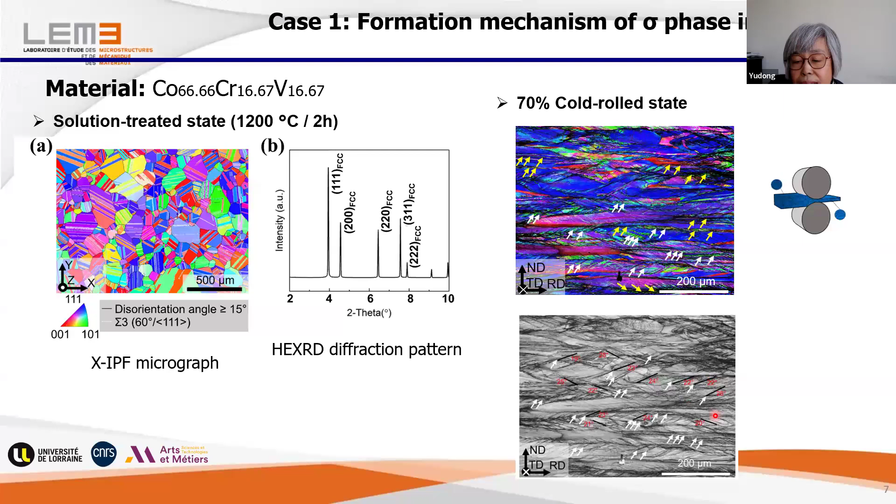If we have a look at these slip bands, we can count the angle of these shear slip bands with regard to the rolling direction, and we can see they are in this range. I will show you something later with this characteristic.

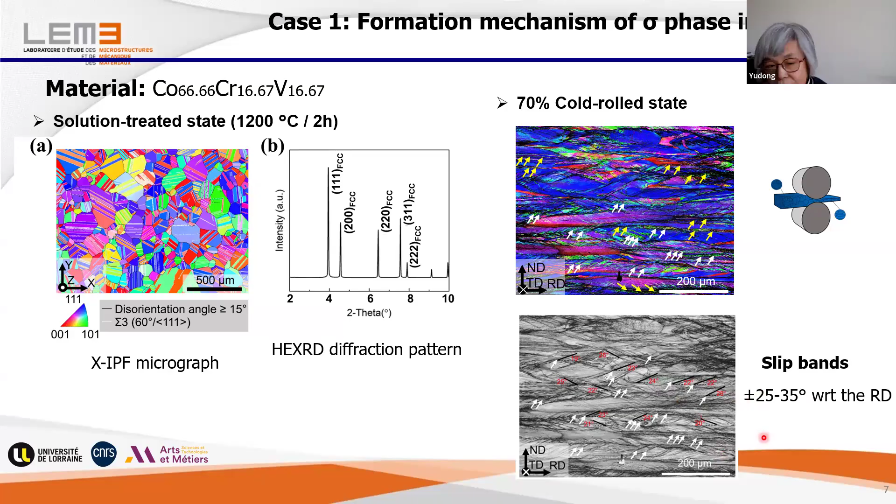After that, we made reheating, or we call it recrystallization, under inspection of synchrotron diffraction. At the beginning, the spectrum looks like this. It is mainly composed of FCC phase, but with some HCP phase. This phase is introduced during rolling.

When we increase the temperature with this heat treatment regime, the HCP phase disappears. But when the temperature reaches 900 degrees C, we see additional peaks appearing, corresponding to the so-called sigma phase. These peaks intensify with increasing temperature and reach the maximum at 1000 degrees C after half an hour of annealing. When we continue to 1100 degrees C, this peak disappears.

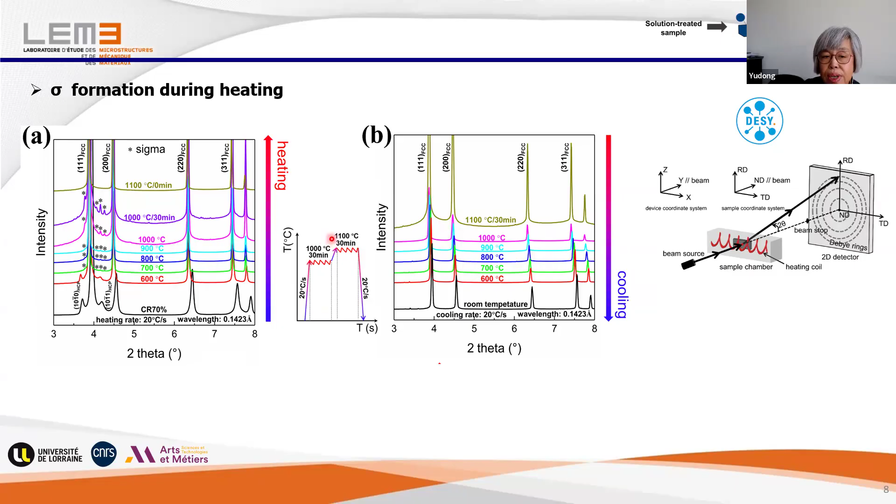When we made cooling, we see the spectrum here; we have only FCC phase. When the material re-experiences the temperature range for sigma formation, we did not get the sigma phase. According to the phase diagram, for this composition we should not have sigma formation during heating from an equilibrium state. This means the sigma phase formation was strictly related to the high density of defects generated by cold rolling.

We know the transformation is from a parent FCC phase, and the sigma phase is a topologically close-packed tetragonal phase. So how did the transformation occur through atomic processes with the aid of crystal defects? With only synchrotron, we cannot see the microstructure. We would like to know where these sigma phases form.

And then we made heat treatment, and we made ex situ examination by SEM EBSD. So we heat the material with the same heating rate. It's very quick. And then at 900 degrees C and these three temperatures, we cool the material in liquid nitrogen to freeze the heating microstructure, and then do the examination.

So we see at 900 degrees C, the material still preserves the morphology of the cold rolling state. And then we had a closer look at the slip bands, the dark area. We can see the white dots already formed in these regions. And you see they did not form homogeneously throughout the microstructure, but are mainly located in the slip band regions. And we know these parts should be full of crystal defects.

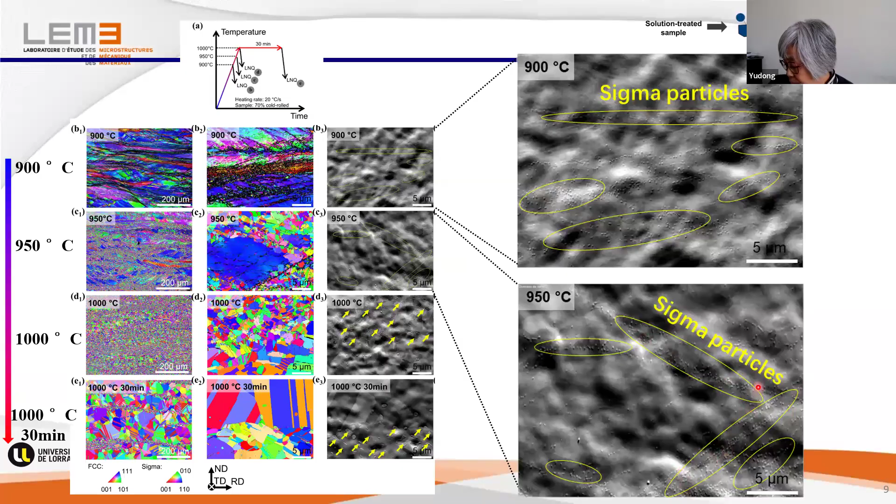And then when we increase the temperature, you see the microstructure is half recrystallized. And still, the formation of the sigma particles is not homogeneous everywhere, but mainly in the slip band regions. And then we continue to increase the temperature, the material is fully recrystallized. And then we can see slight coarsening of the sigma particles.

And now if we hold it for half an hour at this temperature, we see we have a secondary recrystallization. In some parts, the grains grow much more than in the parts full of sigma particles. And we also find the sigma particles coarsen. So with this information, we see the formation of the sigma phase is really related to the crystal defects. We'd like to know what kind of defects, and how they interact.

And then we use SEM ECCI, electron channeling contrast imaging, to study the precipitation and also the defects. And we see here are the sigma particles, and we have annealing twins. And also we have these white lines, and these lines correspond to the stacking faults. So we can see all these sigma particles are intersected by stacking faults on different orientations.

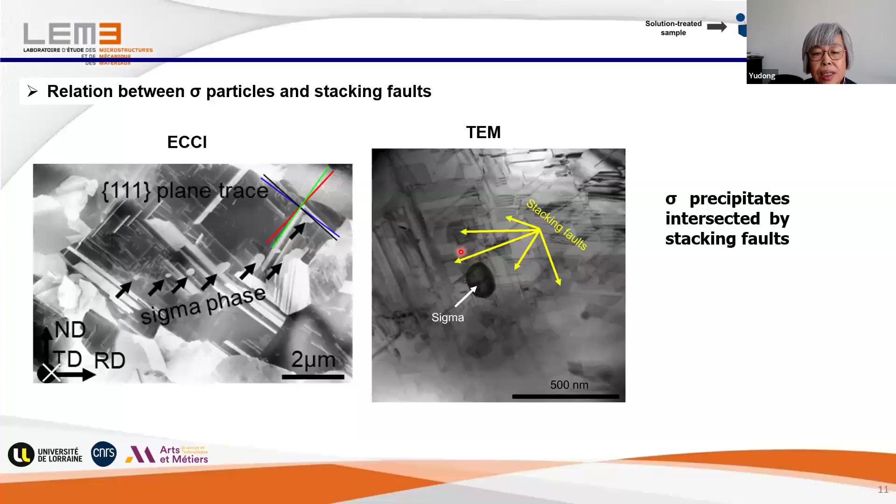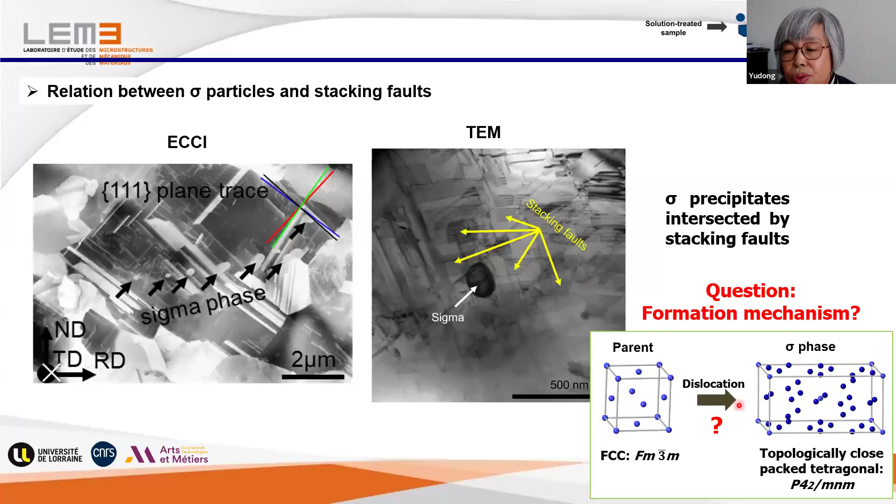And if we have a closer look with TEM, you see here is one sigma particle, surrounded by stacking faults. So the question is, from this structure to this structure, how do the stacking faults and dislocations help this atomic process, because the transformation is really ultra rapid, not normal. And to really know the atomic passage from here to here, we need to have a correlation between these two structures.

So we made a texture analysis, and we see for the stacking faults on the slip bands, the slip plane should be the 111 plane because it's an FCC crystal structure. Then we plot the FCC pole figures here, and be careful, it's not expressed in the rolling coordinate system. It's in this microstructure coordinate system. And we also searched a little bit and found that the 001 plane of the sigma phase has some correlation with the FCC plane. Interestingly, only these two pairs of 111 planes are coupled with this 001 plane, and not the other 111 plane here, you see?

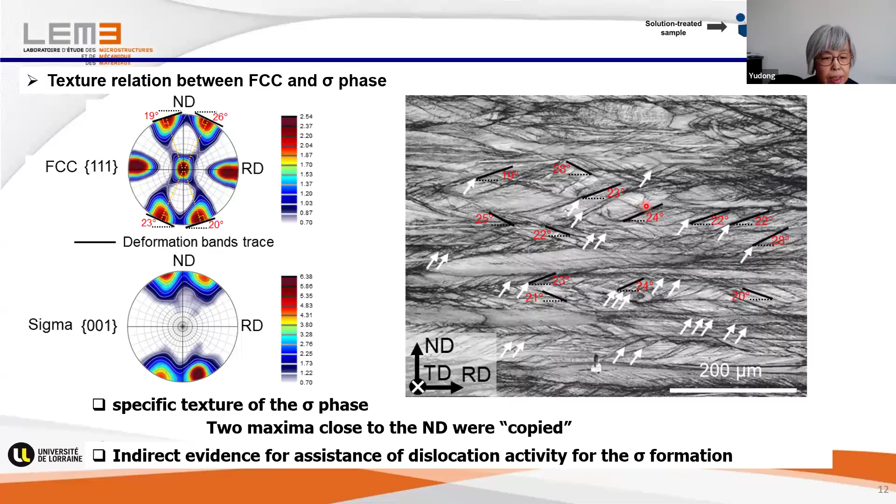And these two pairs of poles' orientations really correspond to the angle range of these slip systems, so the 111 planes. So that means we can make an atomic link between the two structures. So we can go deeper in the analysis to see how the passage happened from this structure to this structure.

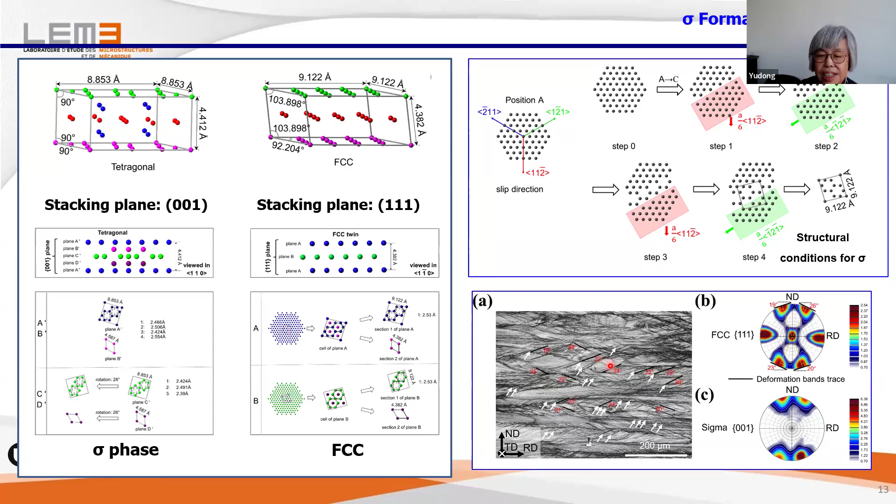And so you see, without any in situ atomic scale characterization technique, we can resolve such kind of atomic passage for phase transformation. So you see how wonderful the crystallographic analysis is. And so this work allows us to really use this, I say, forensic tool, because after that we can study much deeper and represent the process at the atomic scale. Okay, so this is the first example.

For the second example, I will show you how we use this tool to resolve the mechanisms behind the recrystallization process in the alpha phase in titanium aluminide during high temperature deformation. This part of our work is from a second thesis work, by Fengming Qiang. The material we use is at this composition. And in the phase diagram, you see the material is here.

And we heat the material to this alpha phase zone. Here you see the temperature is very high. We can only do it in Gleeble or in dilatometers. And so after holding to homogenize the microstructure, we made compression, and then we made water quenching.

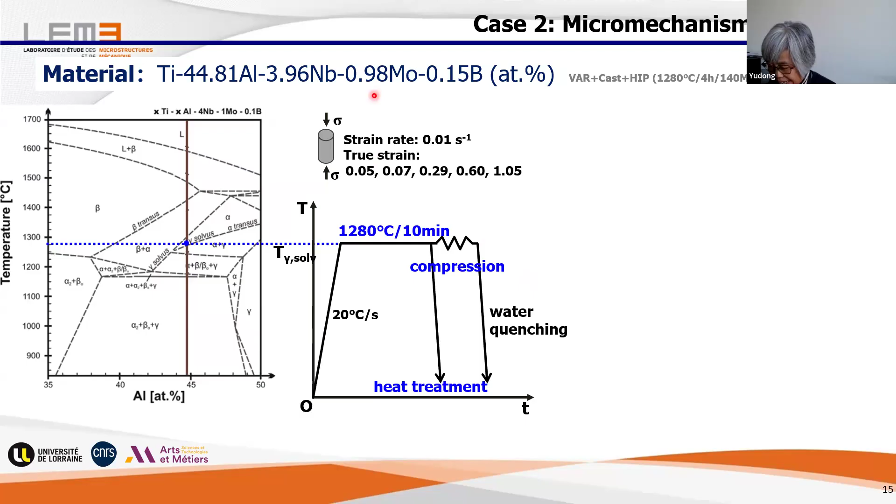Okay, and then during this deformation, we use this strain rate and different true strains until here, and the material experienced such kind of microstructure change. We like to know what mechanisms are behind each step. For this study, we encountered two difficulties. The first difficulty is the single alpha phase only exists at this temperature, and we have to do examination at room temperature. Then how to have the information of the pure alpha phase?

For this, we use a reconstruction of the high temperature phase from low temperature EBSD measurement using this magic Merengue software. It's also made in our department by colleagues Lionel Germain, Nathalie Gey, tutored by Michel Humbert. And then we have a second problem. We can artificially reconstruct the single alpha phase, but if we do examination with TEM or SEM, we cannot examine the dislocation configuration, because at room temperature in the sample we have the beta phase and the gamma phase.

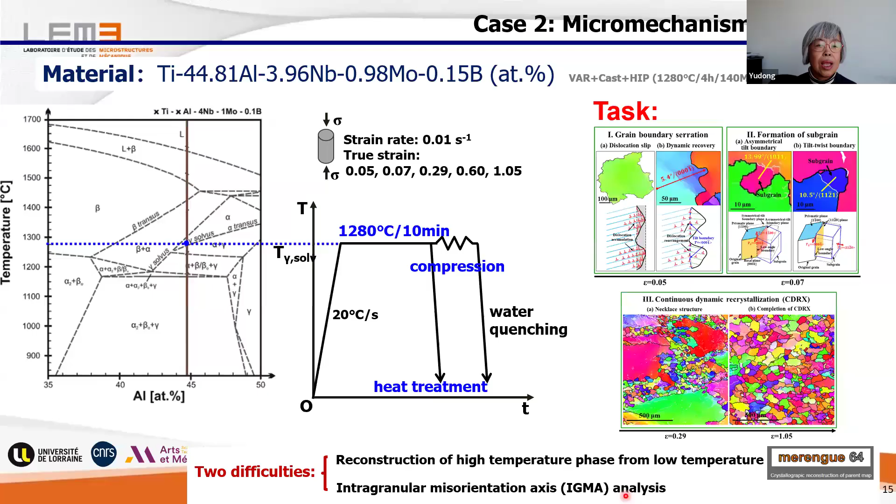In fact, the rotation axis is parallel to the dislocation line, and people call this rotation axis the Taylor axis. This Taylor axis can be calculated using the Burgers vector B and the slip plane normal N. So the method works like this: we measure the orientation of different parts, and we analyze with the software to have the disorientation in angle and axis. Then we match it with the calculated axes of the types of dislocations produced by deformation, and then we can resolve which kind of slip is activated.

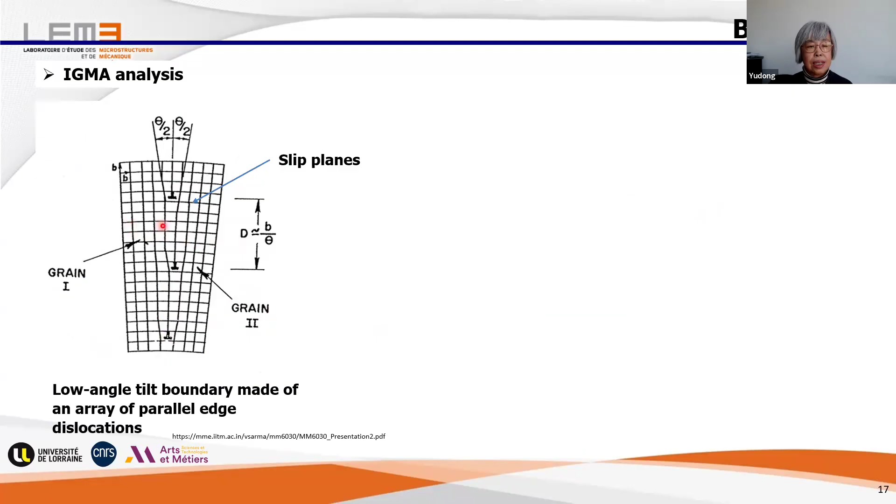Okay. So if these dislocations in the previous configuration are with high energy, with the thermal effect they will reduce the energy, and then the dislocations will climb and form a kind of low angle boundary. And the existence of such a low angle boundary also makes these two parts disoriented. So also we can describe this with the angle and axis, and this axis is also the Taylor axis.

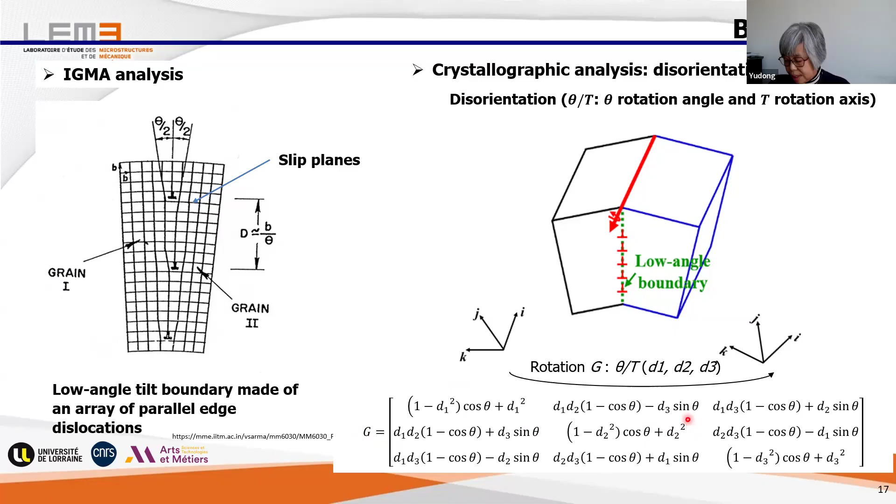And now to analyze this, we have to do a little bit of calculation. This is also a simple calculation with a rotation matrix. So you see, if this part is disoriented from this part, we can describe this with an angle and an axis, and this axis is the Taylor axis. And in this rotation matrix, you can see the components are really only related to the coordinates of this Taylor axis and the angle. And also, if we have these, we can resolve the angle and the axis. Okay, and now back to our material.

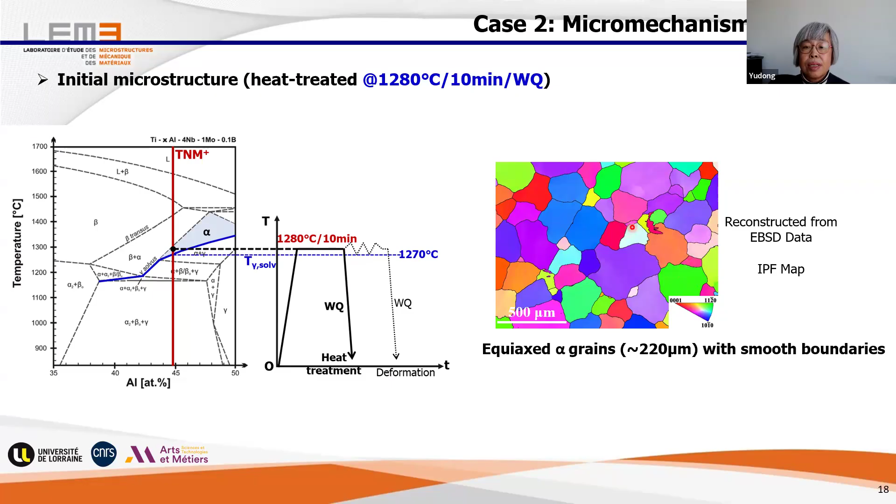So you see, when we heat the material to this temperature and then held it for 10 minutes to homogenize the microstructure, and then we made the water quench to have the initial microstructure before this compression. The microstructure is reconstructed from the EBSD map measured at low temperature, and we see it's composed of coarse alpha grains with hexagonal structure. And the boundary is relatively smooth.

And when we do the compression, with the progress of the deformation, we see the microstructure changes. And now we would like to know what happened behind to drive such microstructure change, so we made a step analysis. At the very beginning of the deformation, the change is only at the grain boundaries. The grain boundaries become not at all smooth, but more serrated. We say it's bulged. In most textbooks, such a bulge is called strain-induced boundary migration.

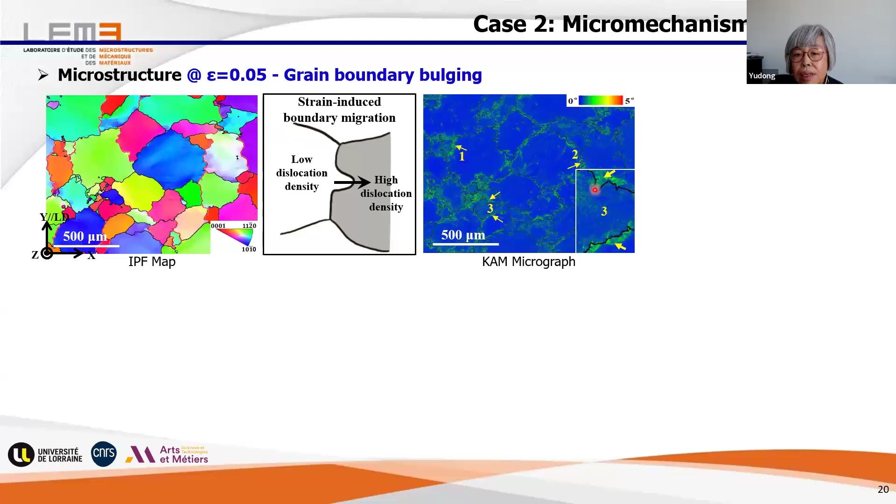And in this case, it's more from the part with low density of defects, that means low stored energy, to high density of defects, that means the high stored energy part. So this is more in the category of recrystallization. And then we made a very simple KAM analysis. Feng Ming, she made this. And from this zoomed picture, you see the situation is exactly inverse. The bulging part is with high density of defects, but in front is lower. So it's not strain-induced boundary migration, but another category called stress-induced boundary migration.

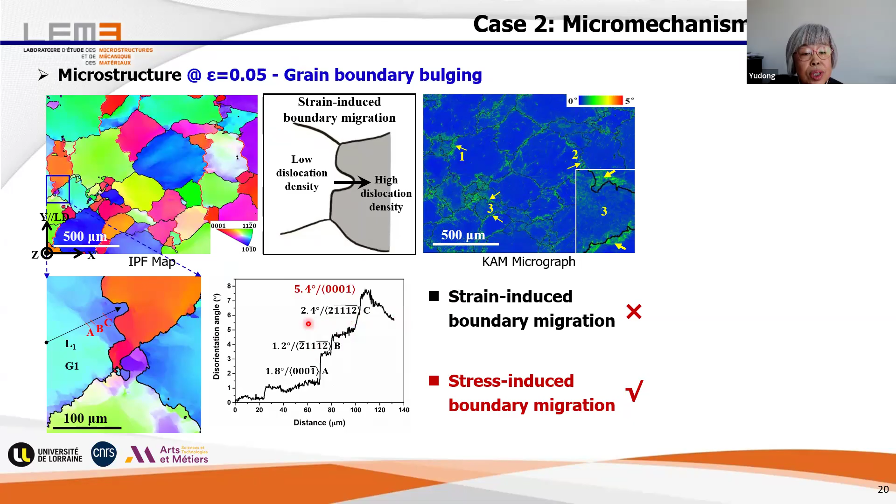Then we try to analyze which system is activated to give all these defects and have this boundary bulging. With this example, we plot the line and analyze the disorientation angle and axis and plot it here, with all the values relative to the origin. So you see the angle: we have plateau, jump, plateau, jump. In every jump the angles are different. But if we have a look at the axes, you see the axes are very close to the 0001 axis. Even with numbers like 2, 1, 1, 12, it's close to 001.

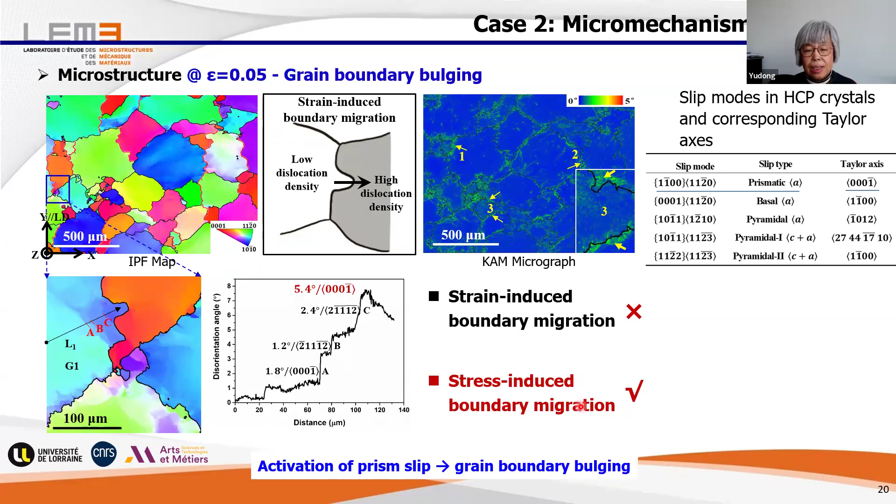And then we analyzed all the possible slip modes in HCP crystals, and Feng Ming calculated these Taylor axes here. Then we just make a comparison, and we see it is prismatic slip a, and the Taylor axis is 0001. So that means the bulging, stress-induced boundary migration, is due to the activation of prismatic slip.

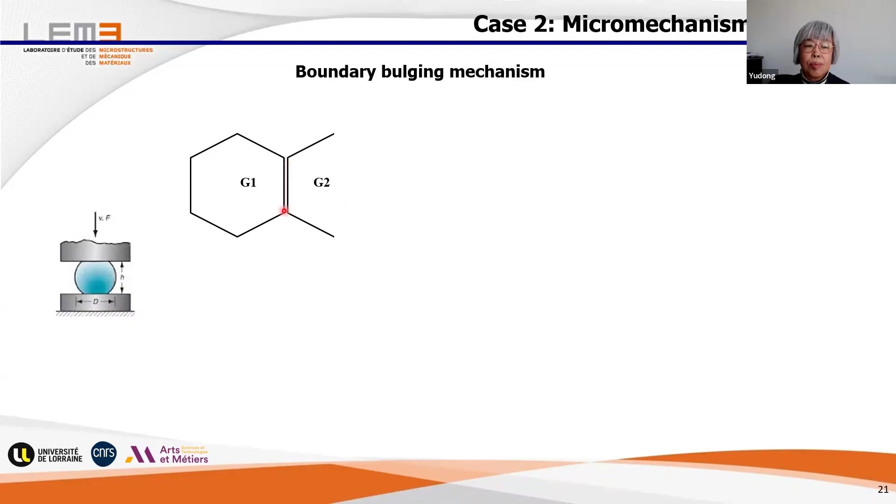And then when the prismatic slip is activated, they will create a lot of dislocations, and these dislocations will move towards the boundary area. And with such a weak boundary, this boundary works as a dislocation sink. So once one dislocation moves into the boundary region, we have a one-step extrusion of the boundary. And if a large amount of dislocations go into this area, we finally have this bulging. So this allows us to see clearly how stress-induced boundary migration happened.

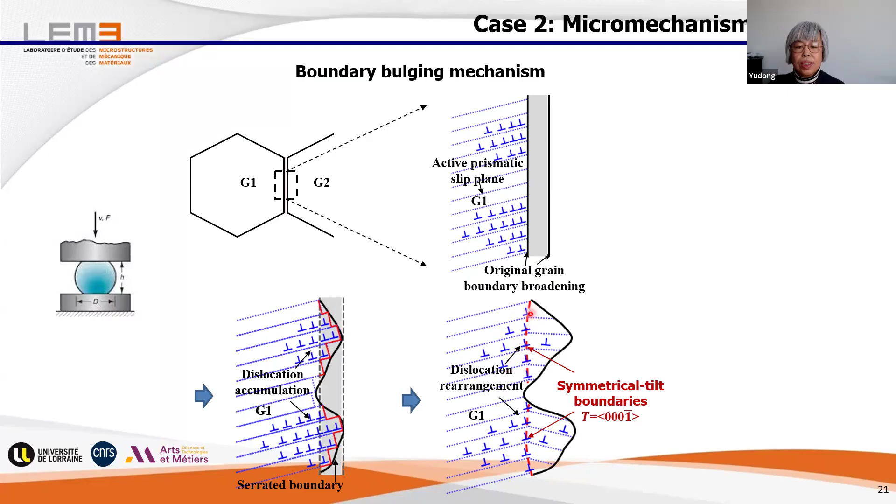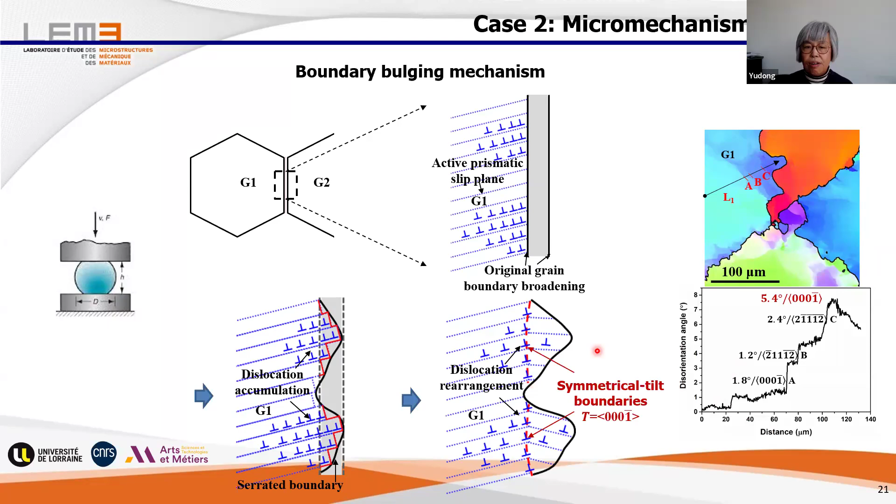But in any case, such a dislocation configuration is not energetically economical. So with the thermal effect, the dislocations will climb to form this kind of low energy configuration, and this is called polygonalization. And this corresponds exactly to what we saw before in the bulging area. If we plot the misorientation along this line, we see the jumps from the formation of such boundaries, at A, B, and C. You see jump, plateau, jump, plateau, jump, plateau. So this allows us to clearly resolve how this bulging happened.

Now we continue. When we increase the deformation to a true strain of 0.07, we see more bulgings happen, but we also see a lot of these white lines with angles between 3 and 15 degrees form along the boundary area, enclosing the bulging part. Fengming made a very careful analysis over a large area and a statistical account, and she found that 40% of such boundaries have the rotation axis 0001, which we already know corresponds to the prismatic slip. But we have another two axes with a large population: one third for these axes, and a quarter for these.

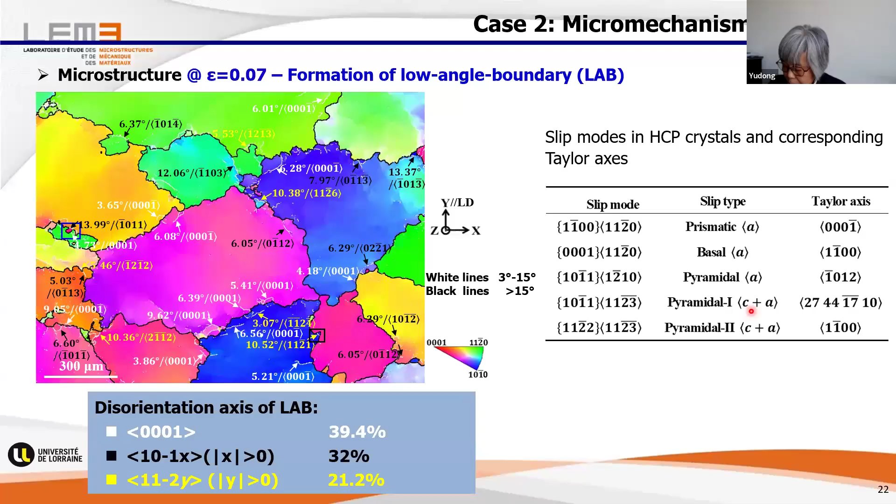In fact, for such boundaries the x and y values are not fixed; they range from 0 to 1. So what is behind the formation of such an axis? We made a comparison with the other slip modes, and we see there's no fit. That means it's not realized by the possible activation of the other slips. So we had to enlarge our search scope a little bit, and we extended this method. We thought at this stage maybe another slip is activated, and we should allow that to happen.

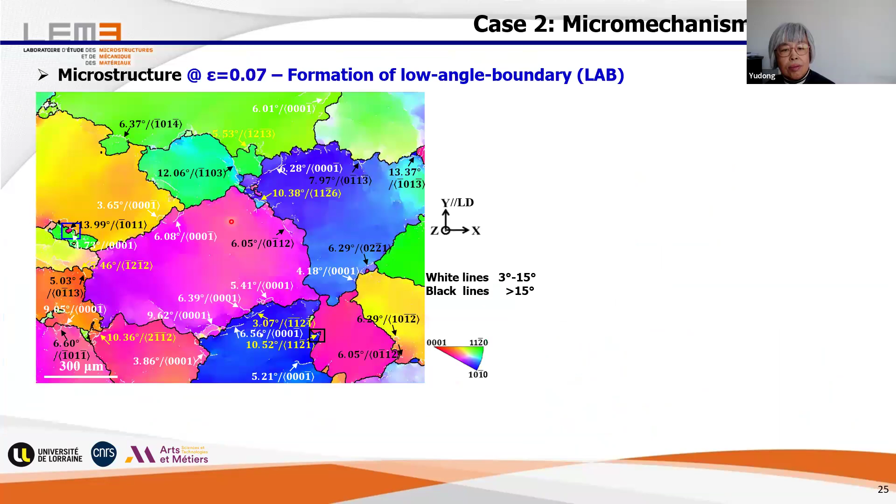And so that means, and we made a further analysis. I have no figures to show here. In fact, the orientation, the trace of this boundary normal, is exactly parallel to this axis. And so that means this allows us to identify that during this process, there's a boundary sliding. Anyhow, we deform the material at a very high temperature.

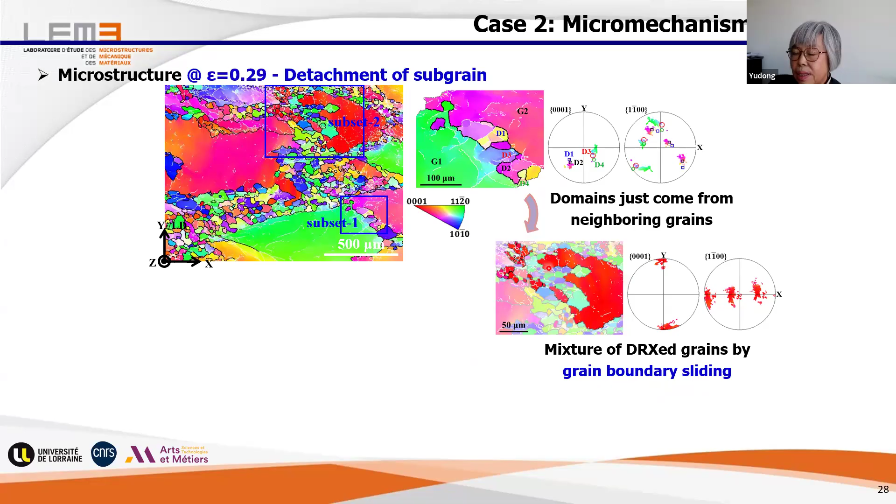That means either upper layer grains or lower layer grains will force in and separate the fragmented part from their mother grain. And with these, we have these boundary regions full of small grains. And now, if we continue our deformation to the final deformation, we see the completion, the full part recrystallized, all microstructure recrystallized.

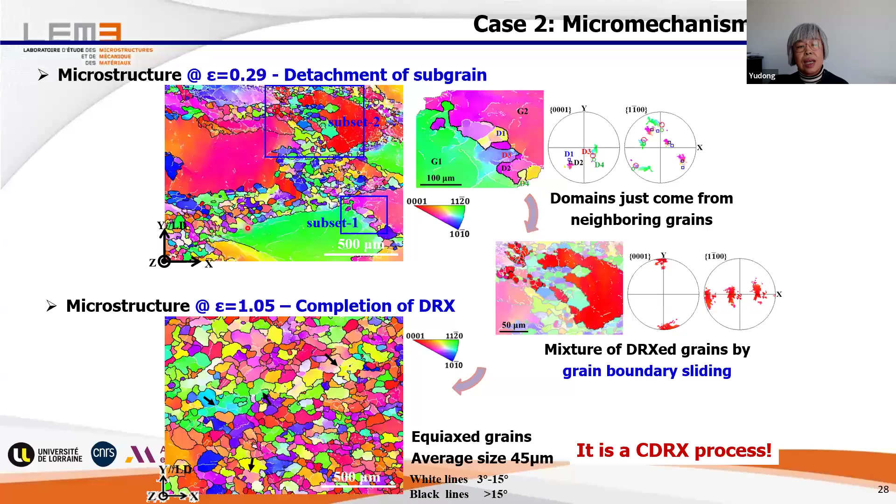And with all these analyses, we can say clearly this recrystallization is a continuous dynamic recrystallization, starting from stress-induced boundary migration, and then evolving by absorbing additional dislocations of different types with grain boundary sliding, and then from the grain boundary layers, zones, to the interior of the coarse grains. And this process repeated until the completion of the recrystallization. So this is the second example.

Now I come to my software. How we can aid by these crystallographic analyses to streamline the TEM operations. And so this is also part of the work of Wang. And the software is already made by Benoit with the aid of Jean-Jacques Fundenberger, and the paper is accepted by Journal of Applied Crystallography. We already have the volume, but not yet the page. And so if you like, next month you can find the paper.

And so you see, for TEM operation, we always need to specifically align the beam with respect to a specific crystalline direction to have a desired contrast. For example, to analyze dislocations, to visualize dislocation, we have to position the beam, allow this beam in Bragg condition, more or less, with respect to here is the dislocation, and with the plane here.

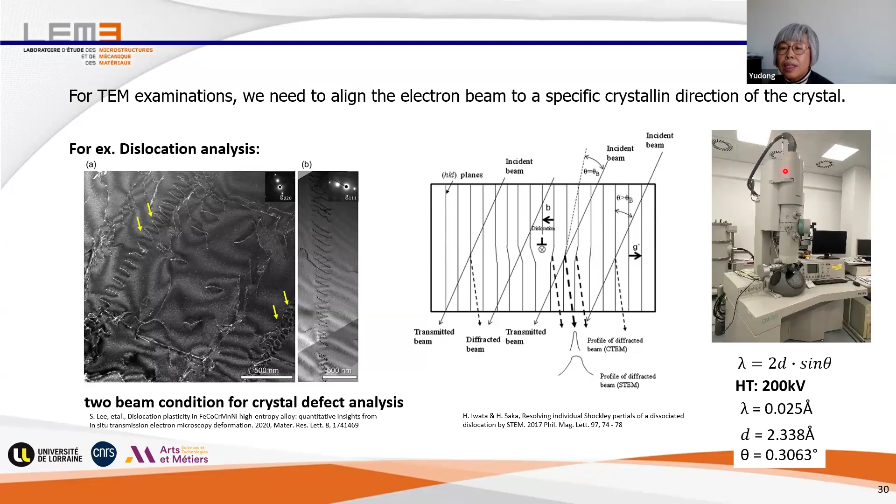But you know, for TEM, the beam is here. We cannot turn the beam. We have to turn the sample to search for the good orientation. So if we do not know the orientation of the crystal we'd like to study, the search would be a painful search, very horrible. It's very time consuming. It consumes the time and effort of the operators, but also consumes the exploratory potential of the TEM. So at the end, we are fully exhausted.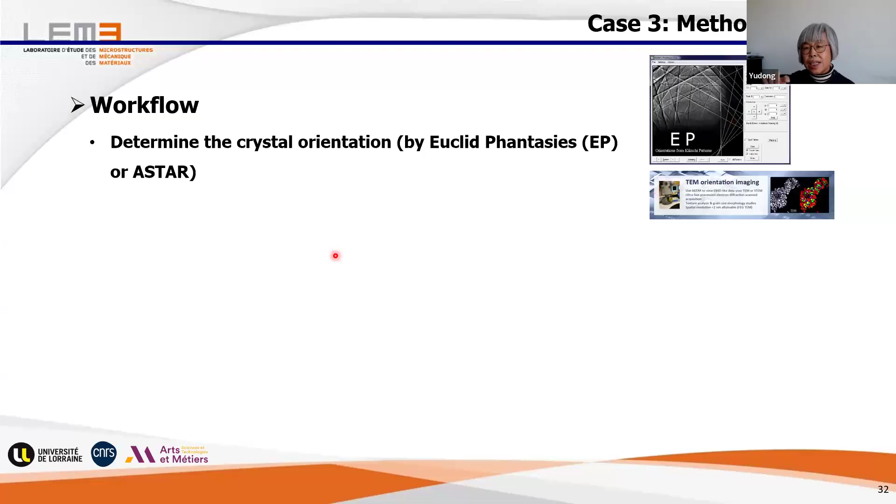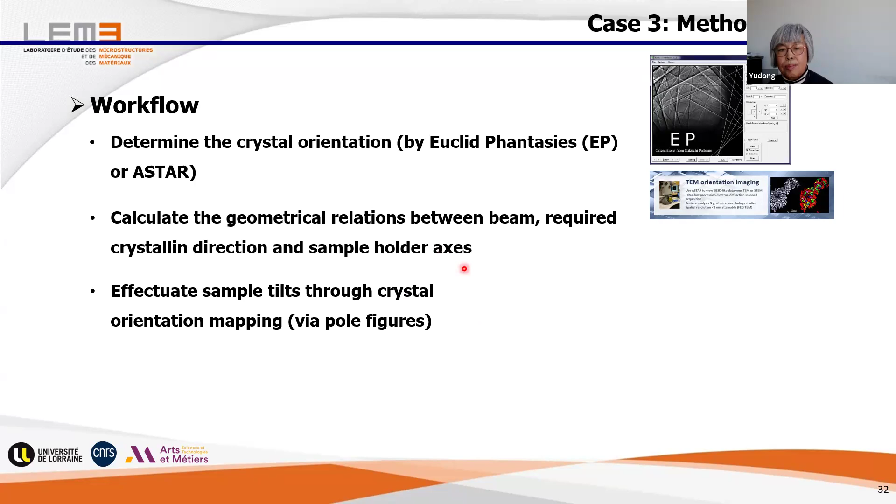But Benoit, since the paper, continued to work on this part. Yesterday evening, he told me that we can also determine the orientation with spot patterns, so it's good news. It will all be in this TEM Aligner. Then with this orientation, the software will calculate the geometrical relation between the beam, the required crystalline direction, that means the reflection plane normal, and the tilt axis of the sample holder. Then the software will tell you how many degrees and in which direction you should tilt your sample to reach either the two-beam condition or the zone axis condition.

The software looks like this inside, and we express all these relations with the pole figure. You see, we have different zones with different colors, and these zones tell us the angle limits of the TEM holder, because in TEM we cannot turn the sample from 0 to 90 degrees. With different zones, either the zone is single tilt, x direction, alpha tilt, or we need double tilts. In zones like this, we will never reach any condition. Then we have to abandon and search for something else.

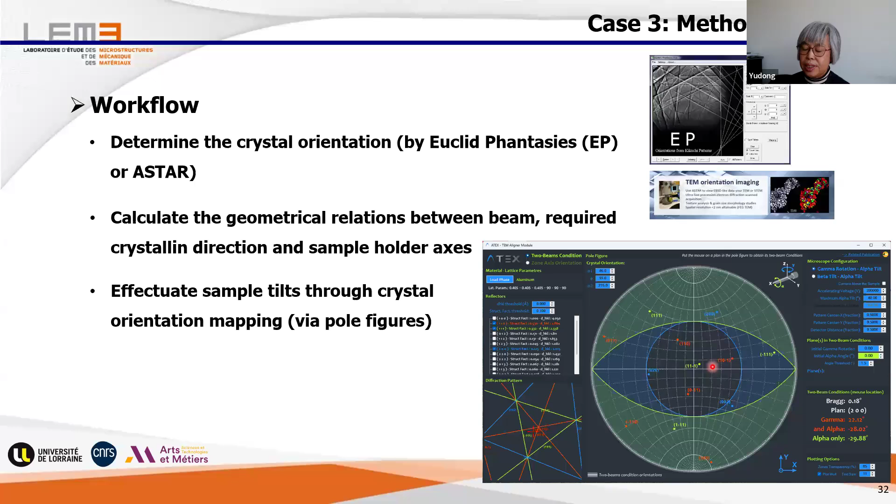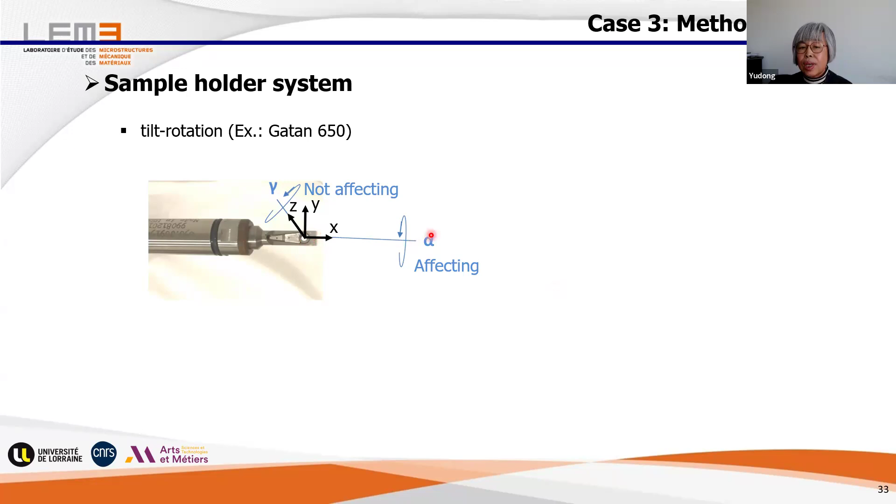Now I have to explain a little bit about sample holders, because we have different sample holders. One type of sample holder lets us rotate the sample around the z-axis, normal to the sample surface, and we can also tilt the sample. This is called the gamma rotation, and we can tilt the sample around the x-axis, which we call alpha tilt. For this, we use the pole figure projection on the equatorial plane, and the beam direction in the software is here, with a pole of an individual crystalline direction here. The second type, the double tilt holder, is alpha-beta. The alpha tilt is always there, and in this case the beta tilt is around the y-axis.

For TEM sample holders, the tilts are specific. For either gamma or beta tilt, when we rotate the sample, the other coordinate axes, either z, x, or in this case y, x, will not be affected. But once we rotate around the x-axis, the whole stage turns, and this will affect the other axes. So we have to be careful. For the second case, we select the projection plane like this.

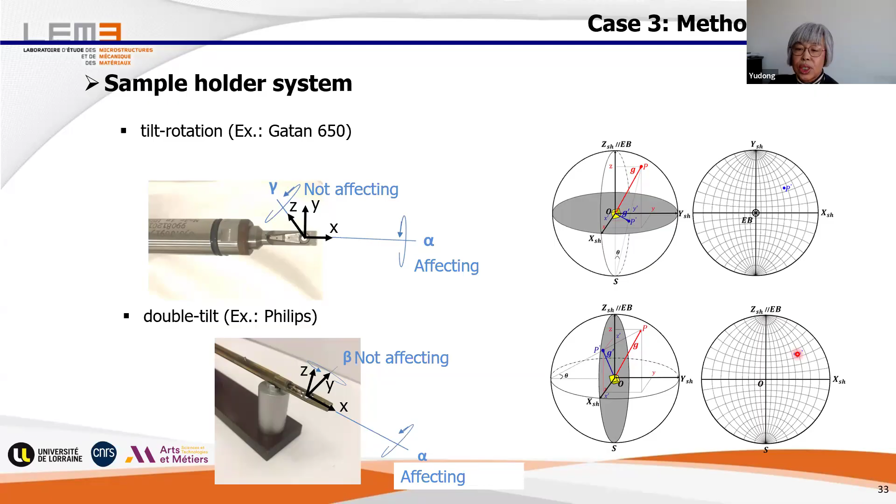And in this case, the beam orientation is here. Beam is here. And then we have the projection of the crystalline direction. And due to these specific rotations, if you use our software, the tilt or rotation order matters. That means either gamma or beta tilt first, and always alpha tilt second. Otherwise, if you reverse the tilt, the calculation is not for such kind of operation.

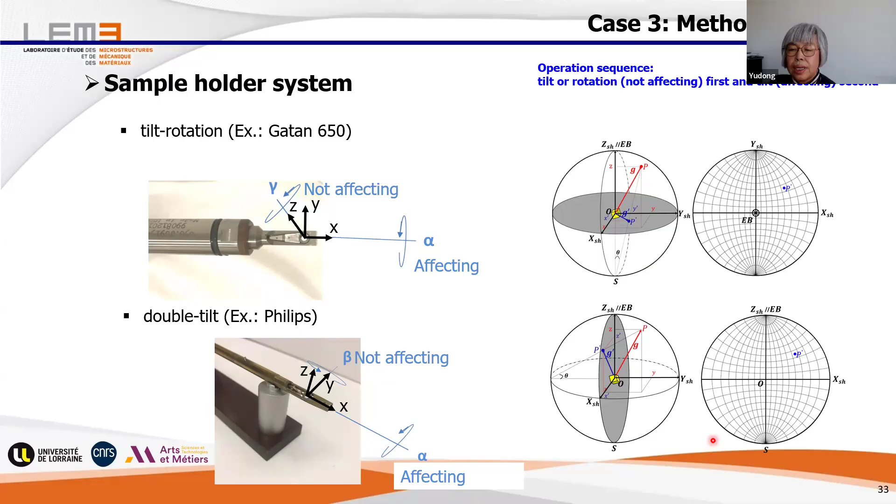Okay, and now I use an example to illustrate how we can use this software to guide our workflow of TEM operation. We also use the material, this medium-entropy alloy. In the initial state, we have equiaxed grains with a lot of annealing twins inside. We have a single FCC phase. And now we deform the material.

And in this application, I will show you how to identify Burgers vectors with this software. We deform this material at room temperature with this strain rate to 2% elongation. And you see, as this is an ultra-low stacking fault energy material, with deformation we form not perfect dislocations, but extended dislocations. You see, with stacking faults, these are the stacking fault fringes, bordered by partial dislocations.

And so this configuration is called extended dislocation. In this application, I will show you how to identify the Burgers vectors of partial dislocations. Then we need the two-beam condition. We used our TEM. It's a very old TEM, nearly 30 years old. But you see the contrast is wonderful. And we use a gamma plus alpha holder. And then the workflow is like this.

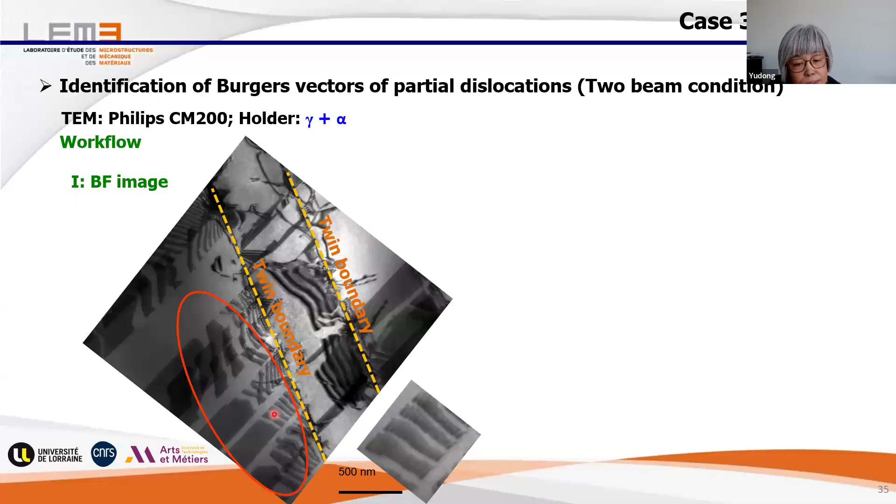And then I take out this small part here and tell you, here are the stacking faults, you see, with the fringes. Because the movement is in this direction, we call this part the leading partial dislocation. The movement of this leading partial is to enlarge this stacking fault part. And the following part is called the trailing partial dislocation. The movement of this partial following the leading partial is to restore the plane to the normal plane.

Okay, and this is the first. I say something a little bit more. Now I should analyze the orientation of this part, so we make orientation determination. For our case, we use our magic software, Euclid Phantasies. We take a Kikuchi line pattern here, and we think all these parts should have more or less the same orientation. You see the Kikuchi lines. With this software, we immediately have all the angles.

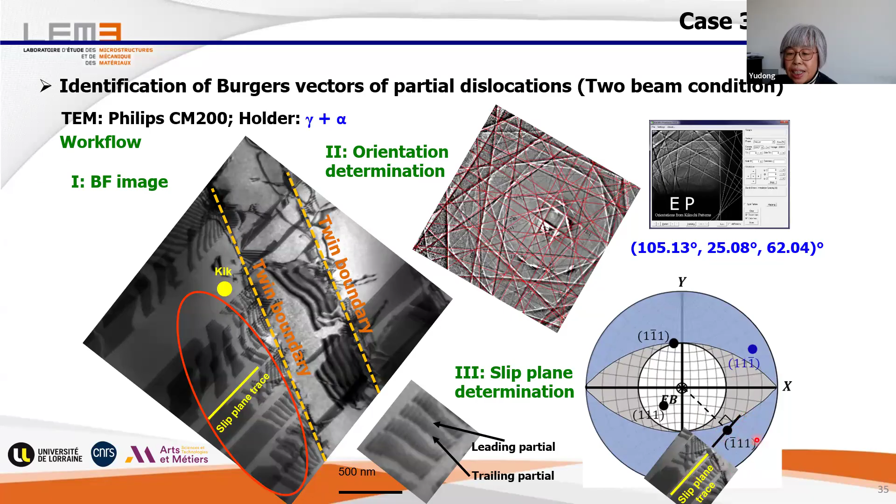So how nicely our work reduces. And now we will use the Thompson tetrahedron to continue to reduce the work scope. And this is the homework we have to do before.

And now, which kind of reflection plane should we use? And then Luda also did the homework. He checked a lot of reflection planes with a big table. Finally, he found these 2 are very nice. And so in this case, we use the so-called very famous g·b criterion.

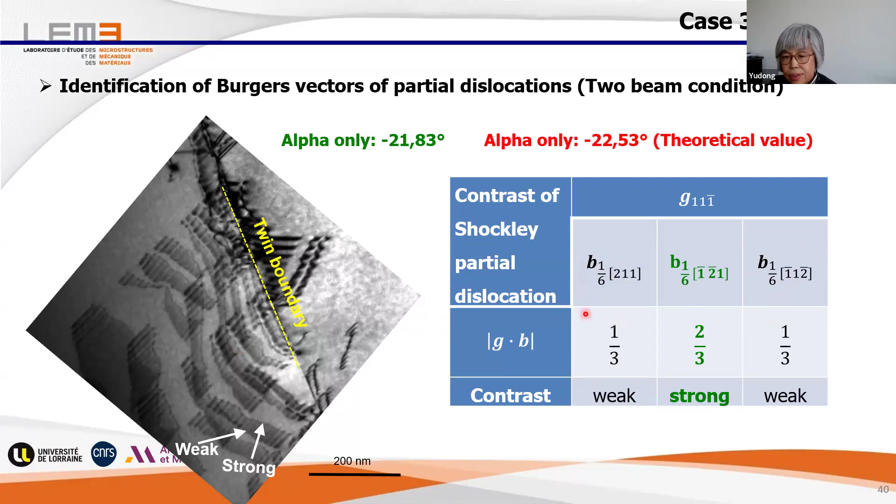And so now we continued, and we see the image contrast is not very nice, but convincingly clear. For the trailing one, we have a higher contrast. For the leading one, we have weak contrast. And you see, that means the trailing one is this Burgers vector. And added to the first results, we unambiguously determined the two Burgers vectors, this and that.